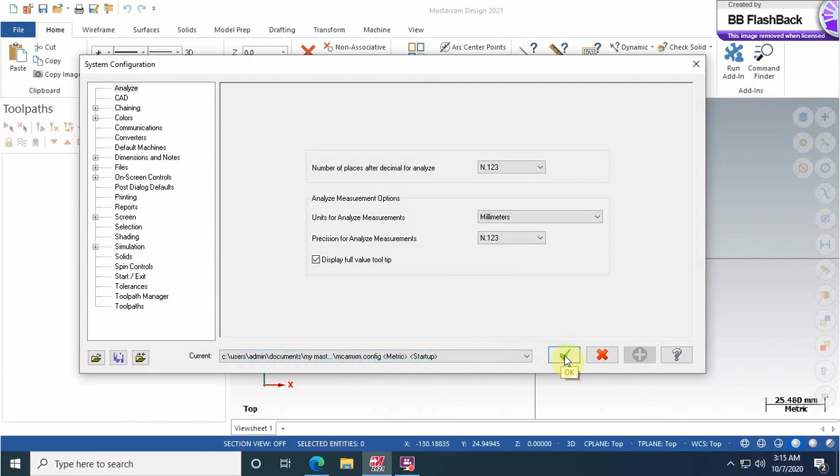For that, first we have to declare the unit. Go to Files, Configuration, and then select metric input, give OK. At the right side bottom corner of the screen we will get metric input.

Second step will be press F9. We will get a cross hair line with 1, 2, 3, 4 quadrants. So for this lathe profile, the second quadrant only we are creating the profile.

For wire cut EDM and the milling operation, directly we will go into the wireframe and then creating the profiles.

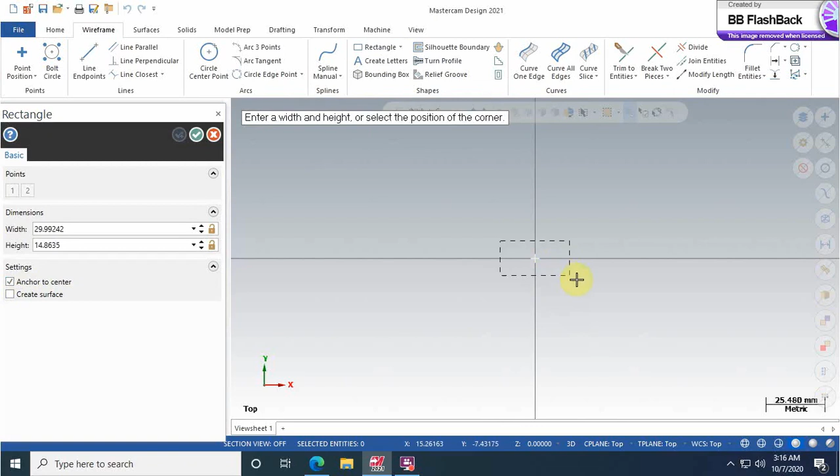Now go to wireframe, select the rectangle option, and then select anchor to center, so that we are taking the middle reference. Then enter the X value and Y value for that spanner portion. Already we know the values: 117 is length and 40 mm is breadth. So X and Y value we are entering, we will get a rectangular portion. This is nothing but the boundary.

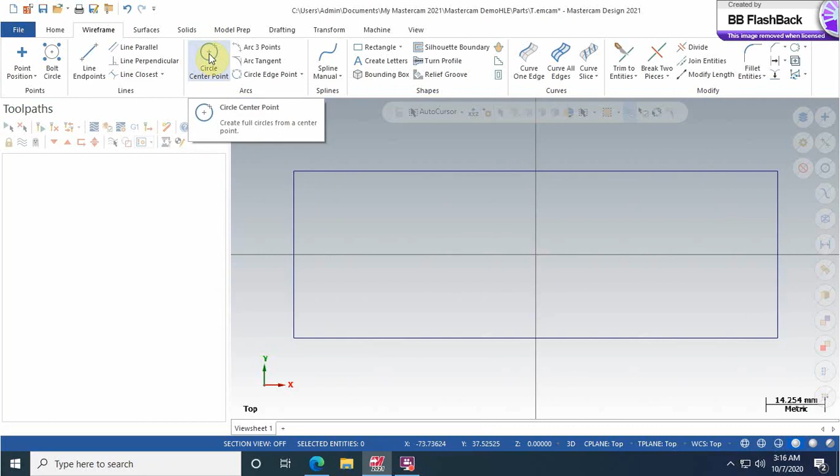Then go to circle option. On the left side we need to create 2 circles and on the right side 2 circles. Select circle option, simply enter the coordinate value as minus 42, 0 for the left side. Click on the screen, we will get a rough circle, and then enter the radius as 5, for the left side it is 5.

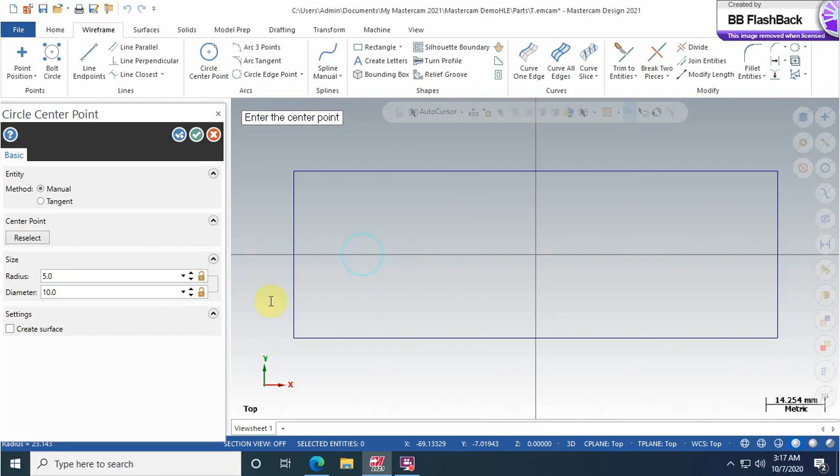Then apply icon, the color will be changing now. Once again keep the mouse at the middle and draw a rough circle, then enter the value as 12.5 for the second circle, then give apply button. So 2 circles have been created.

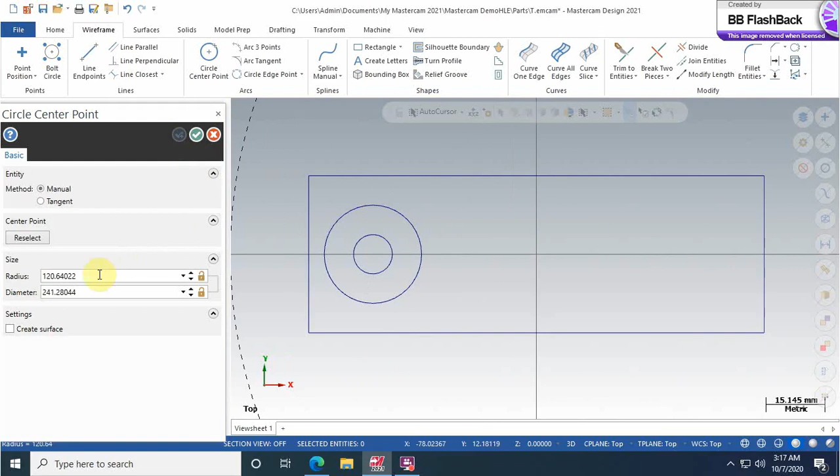Same procedure for the right side also. The center point will be plus 42, 0. Enter the value and then enter the radius. Left side it is 5 and right side it is 6, you just make it 6. In the diagram it is 5 mm only both sides, but normally the spanner both ends will not be equal, so you change it to 6 on the right side, and then one more circle will be created having 12.5 mm radius.

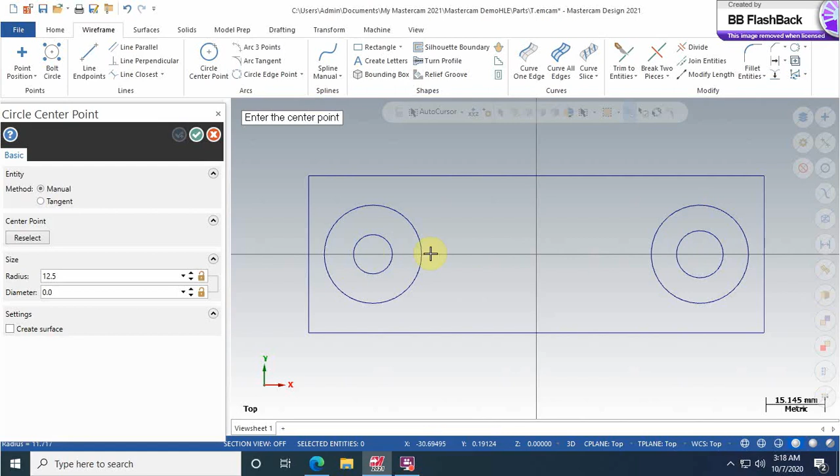Now we are getting 2 circles on each side: 5 mm, 12.5, 6 mm, 12.5.

Now we are going to create slanting lines from the middle point, but before that we have to draw parallel lines. We need to create a center line. The top side is 6 mm, bottom side is 6 mm, so totally 12 mm parallel line we are going to draw.

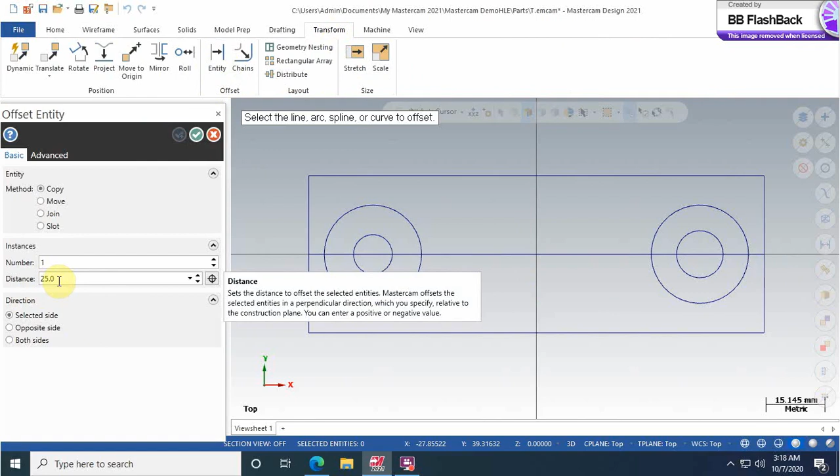For that go to transform option, select entity. How much distance we are going to offset, that we have to declare here, the distance dialog box 6 mm. The top side is number 1, that is one time we are offsetting. Select both sides, top side as well as the bottom side. Now we are getting 2 parallel lines.

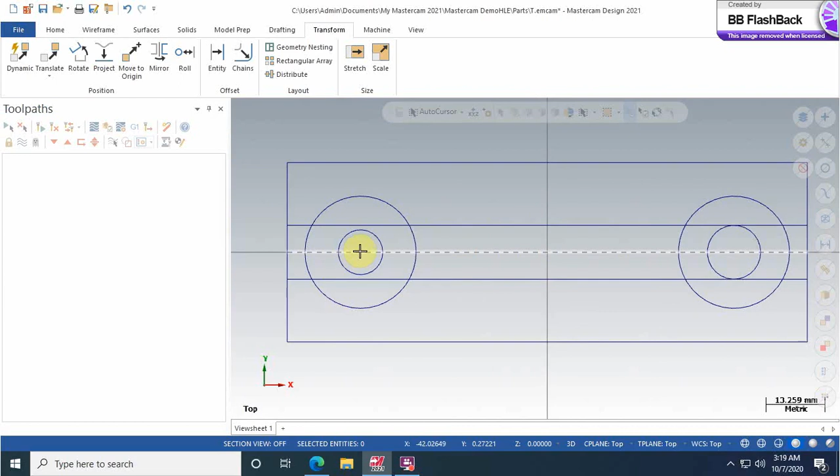Then draw slanting lines on 2 sides, from the center point of the circle you just draw a rough line without giving any dimensions, like this. Click at the middle, draw a rough line, and then enter the angle as 200, left side; right side it is 20 degree. From the right we are calculating 0, 90, 180 and then 200, that is for the left side. Give apply icon.

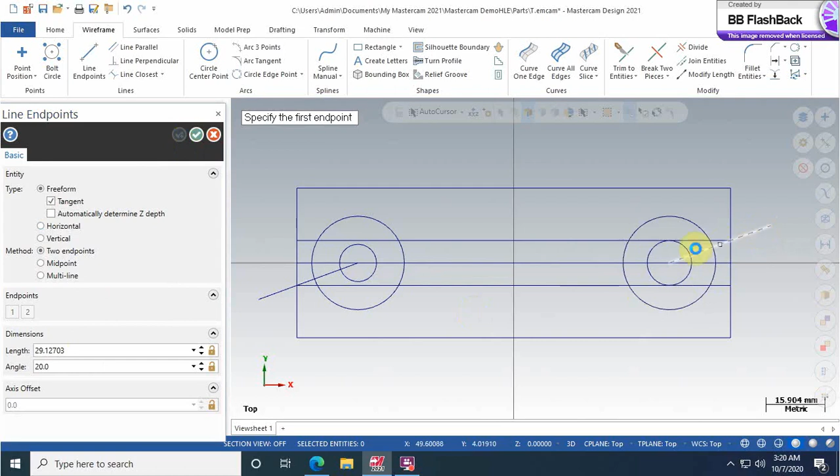Go to right side, draw a slanting line roughly, enter the angle as 20 degree, and then apply icon. The color will be changing now. Now two slanting lines have been created, and then finally give OK.

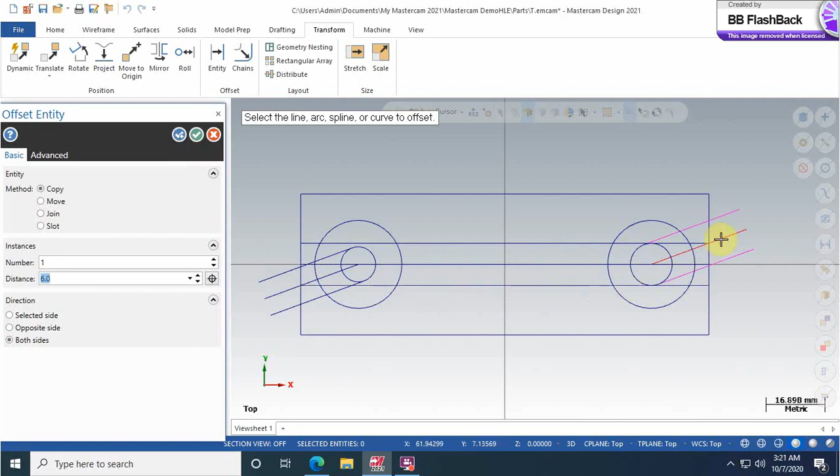So these two lines also need to be offsetted for a distance of 5 mm on the left side and 6 mm on the right side, so that we will get parallel lines. Go to transform, entity, enter the distance of the offset. Left side it is 5 mm, the inner circle radius is 5 mm, so we can give 5 mm offset value. Right side make it 6, then click at the middle. We will get two parallel lines, then give OK. Now we are getting slanting lines on both ends.

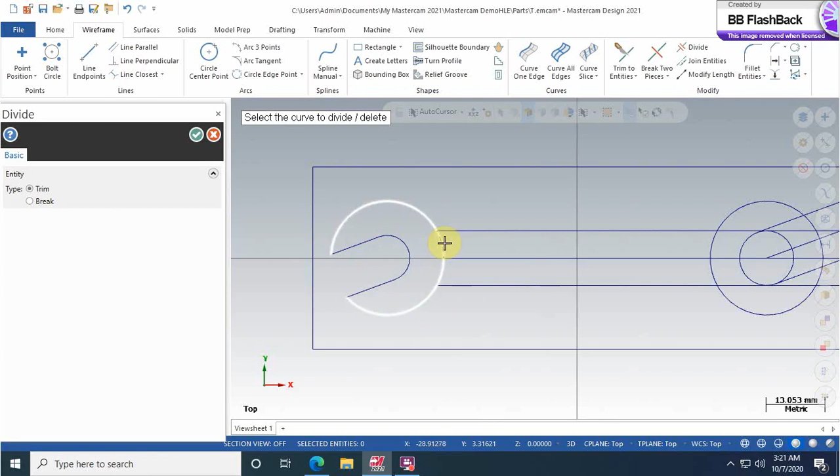Next, so many unwanted lines are there, so that should be removed. For that go to wireframe, select divide option, keep the mouse on the particular entities. The particular entity will be a dotted line, then you just click, go on deleting the unwanted lines. If the line is not visible, zoom that portion and then delete. While deleting the entities, no extra lines should be there. So 100% perfectly we have to trim, so that while selecting the chain, issue will not come. Now right side we are deleting the entities.

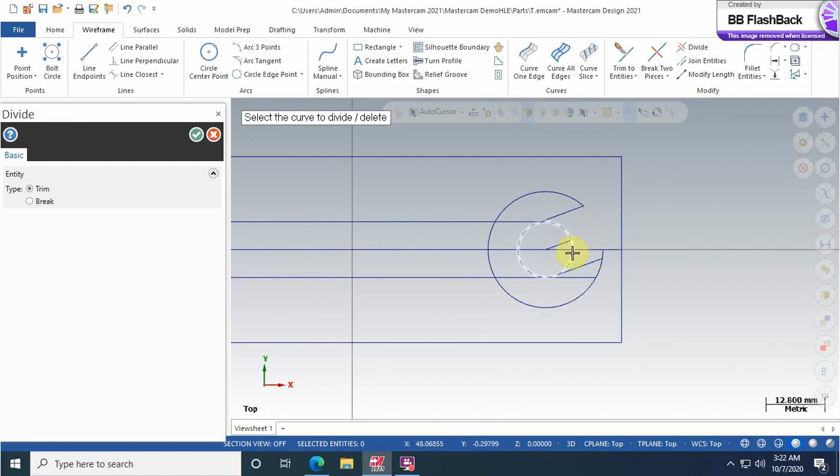Suppose the whole thing is selected, you zoom that portion. Carefully you keep the mouse and then carefully trim. Say here a small line is there, zoom that portion and then trim. Now we will get a proper shape.

Say almost the trimming operation is over. Next, we are going to draw a fillet at 4 corners.

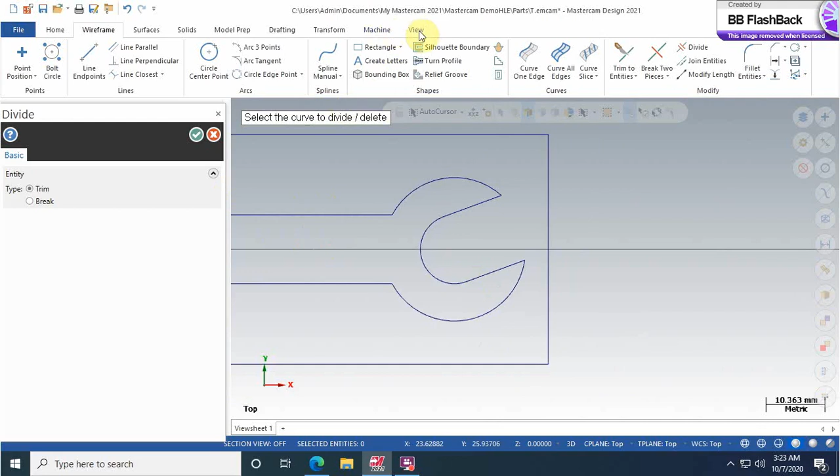Say suppose wrongly we have deleted some portions. You put Control Z, Control Z, Control Z, so that once again we will get the profile, and then carefully trim the unwanted portion. Okay, now we are getting the spanner profile, and then go to view option, give fit to screen.

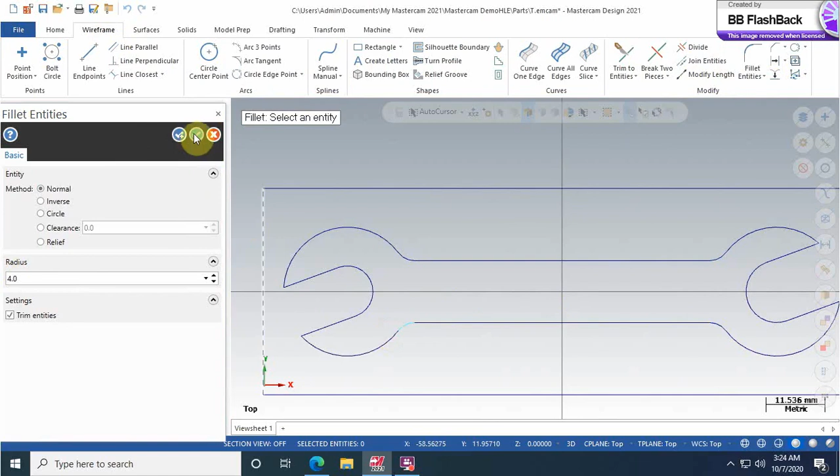The profile is within the screen now, and then we need to create a fillet at 4 corners. For that, go to wireframe, select fillet entities, and then enter the radius as 4 on the left side in the dialog box, and then select 2 entities: 1 and 2, 1 and 2, 1 and 2. So automatically we will get a radius at 4 corners.

Now the profile is over, and then say we have 5 options. Say under which machine we are going to perform this operation, that we have to declare: mill, lathe, router, wire cut EDM, design. So we are selecting wire cut EDM, and then

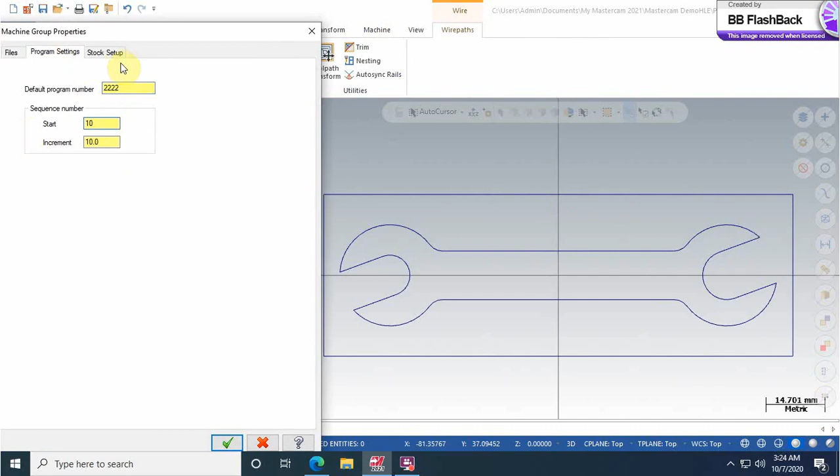giving program number and a block number. Okay, and go to stock setup, select all entities. Automatically X value, Y value will get set, and then thickness only 6 mm, 6 mm both sides we have to enter, so that the profile will be at the bottom.

Say for wire cut EDM, we need 2 points: thread point and cut point. For that we have to create 2 points. Go to point position under wireframe. First one is a thread point.

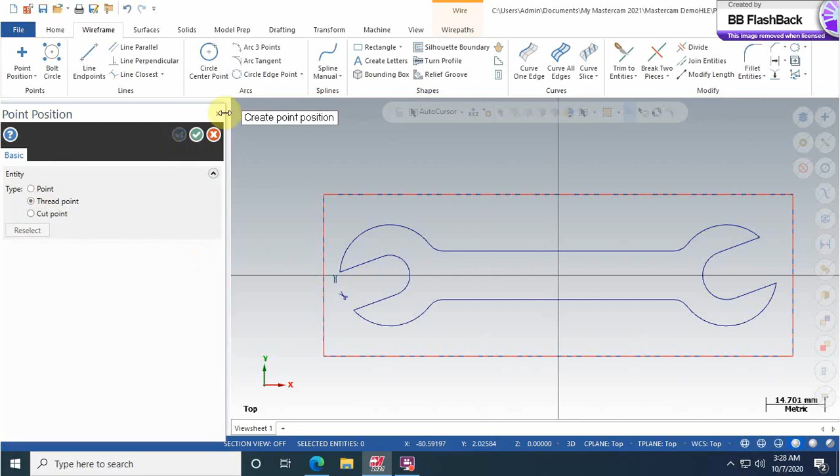Through that point only the wire is entering into the profile. That we have marked. Give apply icon, and then go to cut parameters. One more point we have to mark, that scissor-like point is nothing but a cut point. The above one is nothing but a thread point, and then select wire path.

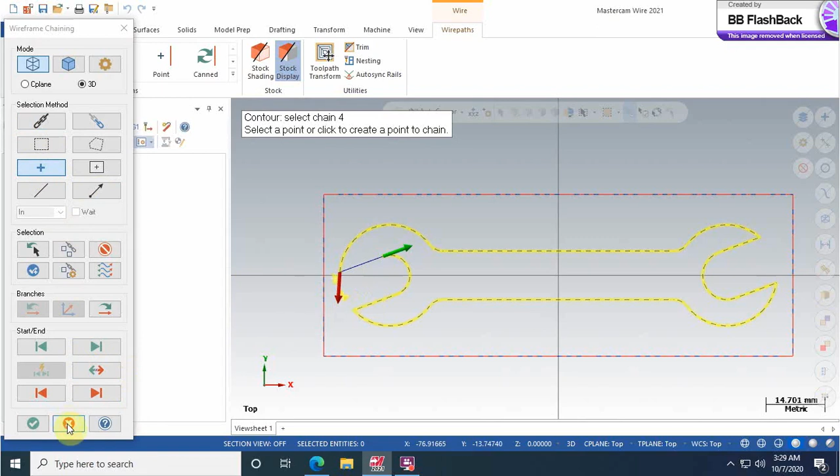Say once again I will tell: after giving them 2 points, thread and cut points, go to wire path, select contour. First select point selection and then select the thread point, and then go to chain option, select one chain, change the direction of the arrow mark, and at the same time we have to click one more point, we will get red,

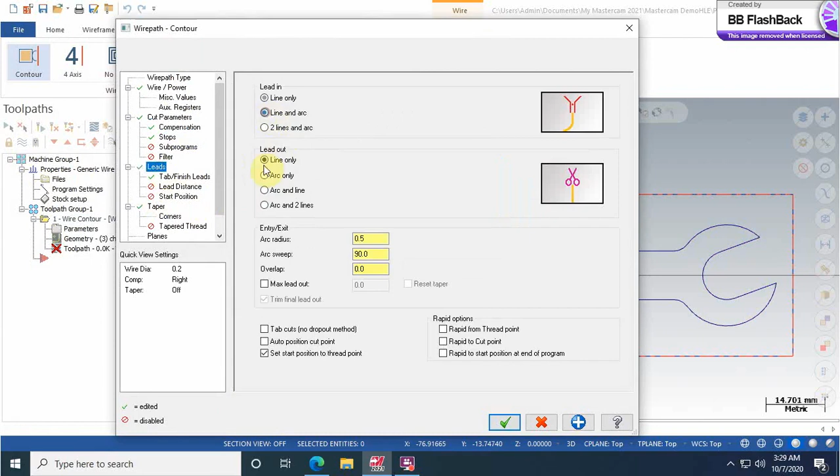and then once again go with the plus mark and then click at the cut point. Okay, so the thread point and cut point, through that cut point the wire is coming out, that is the point. The last option will be UV trim plane and UV height, both will be 6 mm, nothing but the thickness of the blank.

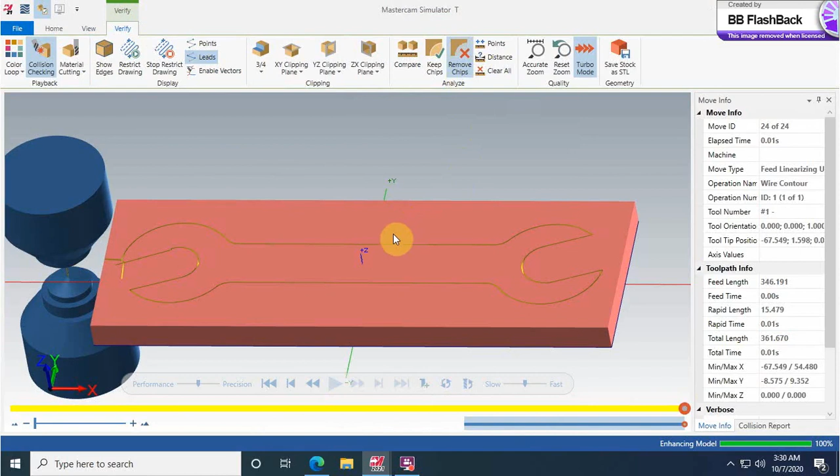Here the wire diameter is 0.2 mm. We are using a brass wire 0.2 mm, that we have to enter, and the radius also we have to enter. This is nothing but compensation, right. The tool is moving in the anti-clockwise direction, so automatically the tool position will be right. So right compensation. These parameters we have to enter, and then

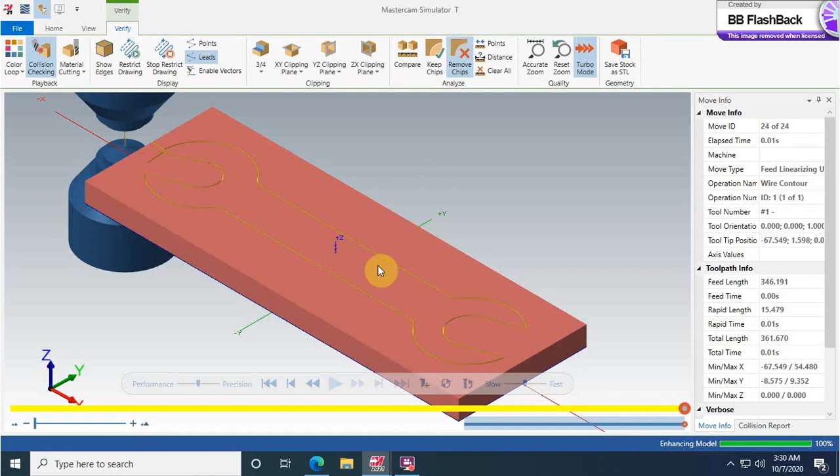now we are getting the simulation line. Say how the cutter is moving, that we have seen. Now go to verify and then say which portion we want to keep. For that go to verify option, select remove chips. Say once again go back,

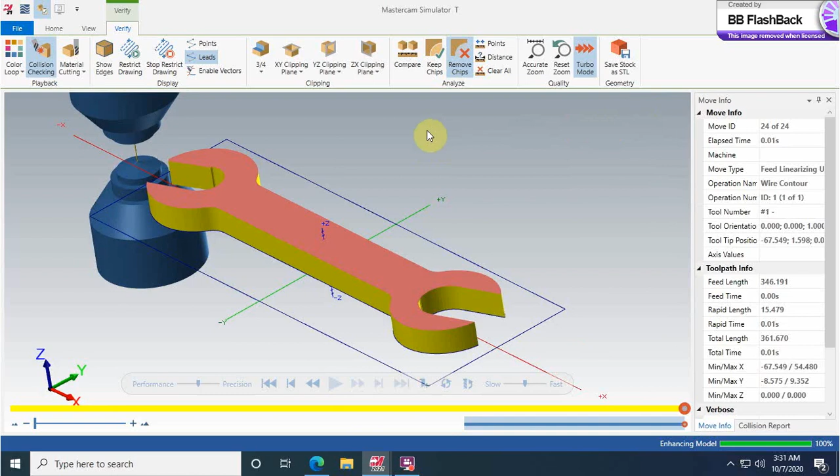comfortably keep the blank, and then put it in isometric view. Start. Say after simulation is over, we have to separate the part. Okay, for that remove chips option to be selected. Say above, the verify option is there, you select that part,

select remove chips, and then we have to click outside of the profile, so that the inner profile, the spanner profile, will be on the screen. That portion only we need.

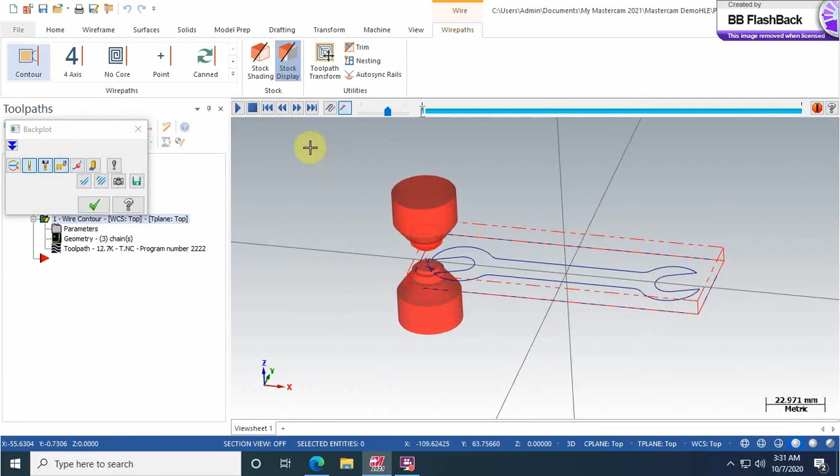Suppose wrongly we have selected, clicked inside the profile, that portion will be removed and scrap will be visible. Okay, so this is the way to do the wire cut EDM operation.

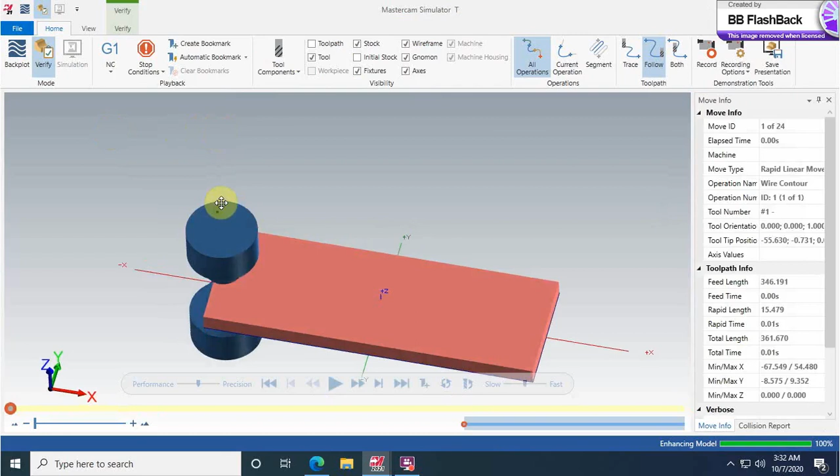Say this blue color is nothing but a wire holder. Okay, so on the top side the wire is there, through the hole the wire is coming into the workpiece, and on the bottom side, another side, that wire is collecting.

Say brass wire 0.2 mm we are using for wire cut EDM. Once again go with remove chips.